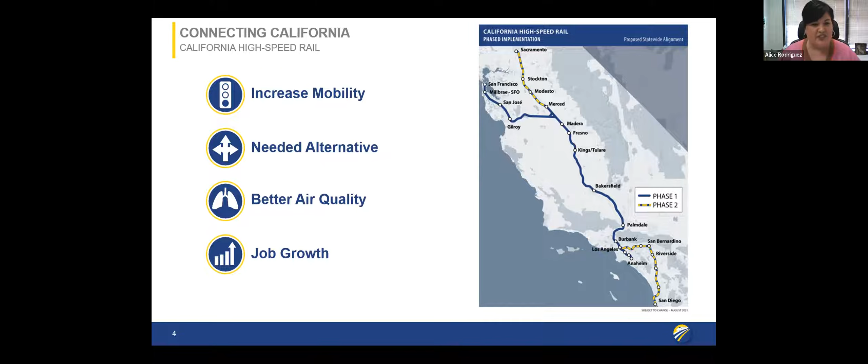All right, let's dive in a little bit deeper. I'll start in the middle of the map here, that yellow line. 119 miles is actively in construction from Madera to just north of Bakersfield. As you extend up from that dark yellow center line, you see Merced to the north and Bakersfield to the south. That represents an initial operating segment we're working on now, and we are committed to complete it.

There's other work happening across the state. If you look to the north from San Francisco to San Jose, high-speed rail is a funding partner with the Caltrain electrification program, so that's already underway. Additionally, down in Los Angeles, we are a funding partner with LA Metro on the improvements happening to the LA Union Station.

The rest of that dark black line on the alignment represents places where we're still working on environmental clearance. Right now, we have nearly 300 miles already environmentally cleared. By the end of the year, we will have over 400. And then station planning is happening as well across the alignment.

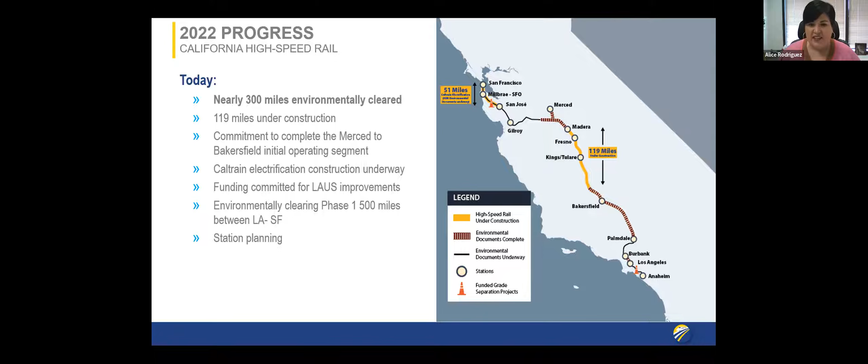Okay, so here's some of the things that are already happening. This is our progress as we look at where we are right now in 2022. We've already created over 7,300 construction jobs, including national targeted workers. 653 small businesses have already been employed, including 213 disadvantaged businesses and 76 disabled veteran business-owned enterprises. We're very, very proud of that.

As I mentioned before, California High-Speed Rail will be run on 100% electric and renewable energy. Already we're doing things like using Tier 4 equipment on our construction sites, hoping to provide a mode shift already in the construction of high-speed rail. And once high-speed rail is built out, we'll reduce vehicle miles traveled, about 400,000 cars off the road annually, which is quite significant.

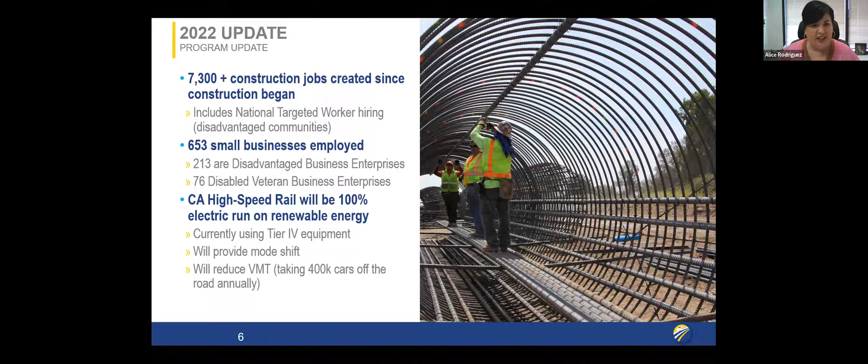I think that wraps up my slides. Let's see.

Okay. So as I do this, our first panelist, Michael, if he wants to share his screen, I'll do a little introduction. Michael Heke is a mechanical engineer and specialist in fluid dynamics. He started his professional career as an aerodynamicist 16 years ago at DB Systemtechnik, a branch of Deutsche Bahn AG. During that time, he worked on many topics regarding tunnel and train aerodynamics as an engineer, project leader, and consultant. His special field is the sonic boom phenomenon. In close collaboration with German authorities, he established a national German regulation regarding sonic booms. Michael, welcome and take it away.

Okay, thank you, Alice. Today I'm going to talk about a very special phenomenon on noise emissions. We call it the sonic boom. The naming comes as it sounds very similar to the sonic boom from an airplane traveling at supersonic speed, but the physics behind it is a little bit different.

So I go to the next slide. Can you see with my red dot? I'm not sure if the sharing works well. Yes, we can see it. Okay, thank you, thank you.

So when the train enters a tunnel, the air in the tunnel is compressed and a compression wave is formed. Here is an illustration of this compression wave. It consists of two parts: a strong increase due to the head entry, and a weak increase due to the entry of the train body, due to frictional effects. This first part is the relevant part.

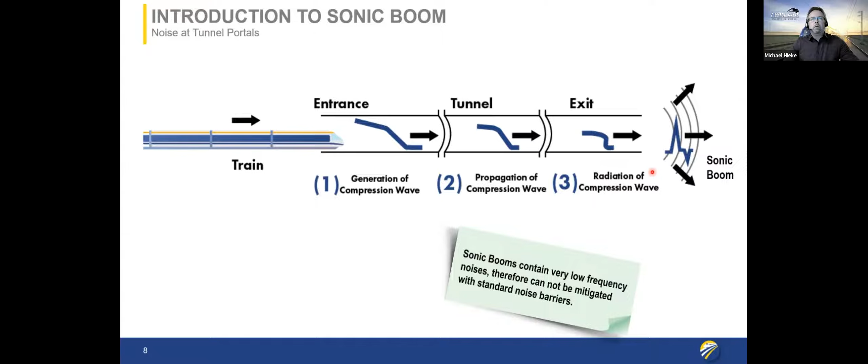Here you will see a video from Spain, I took it from YouTube. This is a very unfavorable case - this tunnel has no mitigation measures, and you will hear a very loud sonic boom. So please enjoy.

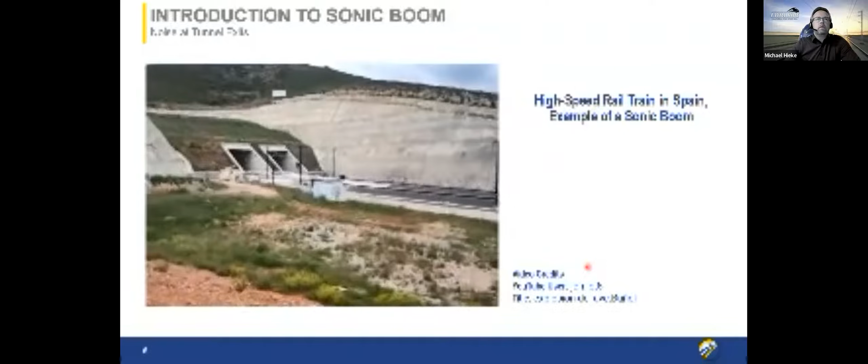Yeah, so that was the train generating this sonic boom. What factors influence the sonic boom effect?

On operating conditions, you have the operating speed. The faster you travel, the stronger the sonic boom will be. On infrastructure, we have the cross section of the tunnel, which is relevant. The smaller the cross section, the more the air must be compressed, the higher the pressure and the higher the gradient.

Also, the use of slab track. Maybe I have to explain: slab track is when the rails are mounted on a smooth concrete surface. It's quite fixed and quite strong and good for high speed, in comparison to the old track bed where you have ballast stones. We have the sleepers and the ballast stones, but for high speed you usually use a slab track, which makes it more stiff. Slab track has no damping effect for the compression wave when it travels through the tunnel, so slab track is a little bit bad for sonic boom.

Tunnel length is an important thing. The longer the tunnel, the more the compression wave can steepen. The design of the portal hoods matters too - the shorter the portal, meaning a vertical portal, gives you the shortest entry time. If you have a sloped portal, the entry time is a little bit longer, and therefore the gradient is a little bit smaller. Or you have portal hoods - I'll come back to this later.

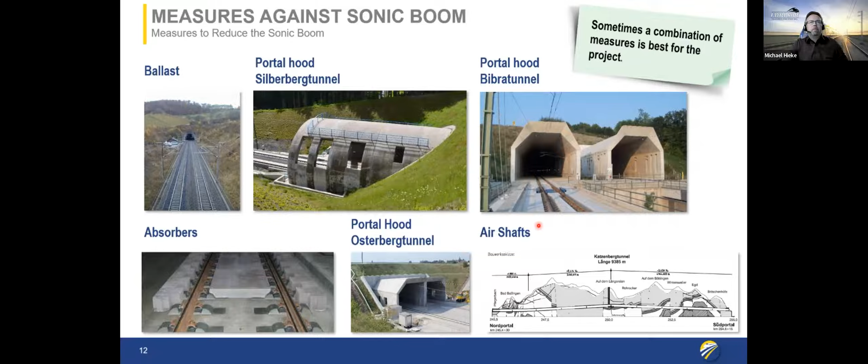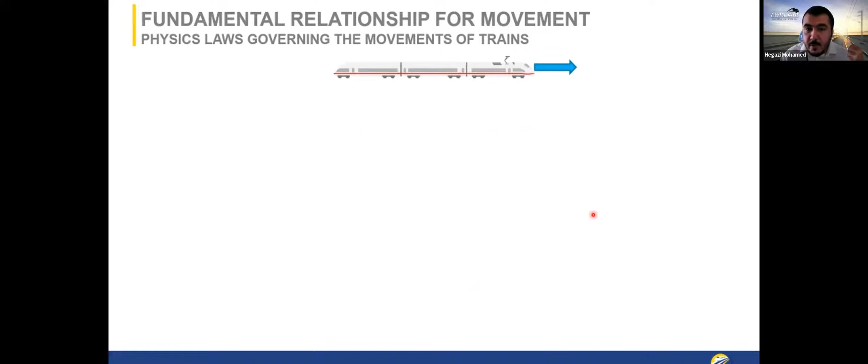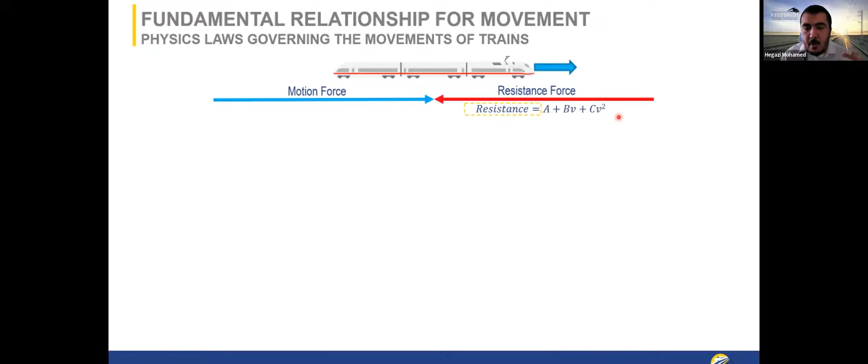Now I'd like to pay some special attention to the resistance force to gain an appreciation of how much force resists the motion of a train. A resistance force is made up of three main components, shown here as the sum of three components: A, BV, and CV squared. A, B, and C are coefficients, they're factors, and V is the velocity or speed of the train.

But then you have dynamic resistance forces that increase proportionally to speed, like flange rail contact. Railway wheels have a flange, a lip, that rubs against the inside of the rail to keep the train within the tracks. The faster the wheels spin, the more friction is generated with the inside of the rail, and that is a dynamic resistance that increases with speed. Then you have aerodynamic resistances, which are proportional to the square of speed, so they increase non-linearly, mainly because of movement in air.

That's related to a point Michael talked about in the previous presentation, where he focused on the specific case of trains in tunnels, where the air doesn't really have much space to go except forward, because the tunnel is restricting it. But even if a train is not in a tunnel, it still has to push air molecules away, and that is a resistance. So for high-speed rail that goes up to these high speeds, you start to see the amount of resistance the train has to combat.

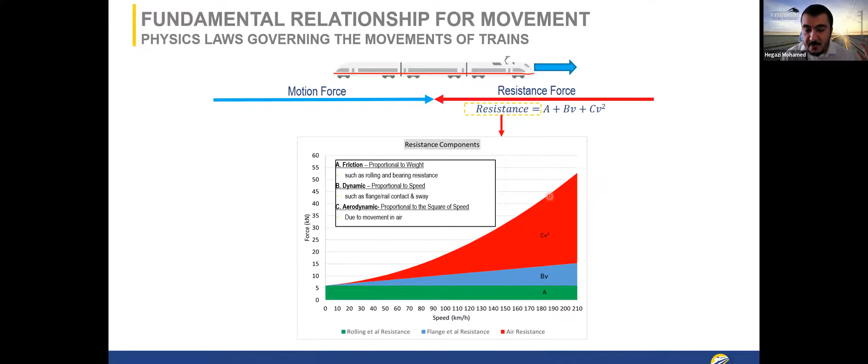So the faster you go, the more resistance, and then you need more force to combat this resistance so you can go even faster. This translates into power, so we have to calculate power to size up our engines, for example, or to know how much power from the utility your electrified train, if it is electrified, will draw. This power is mostly in watts, kilowatts, or megawatts. Power is a product of force and speed, so the faster you're going and the more resistance you face, the more force you need to keep accelerating, and that causes your instantaneous power demand to go up.

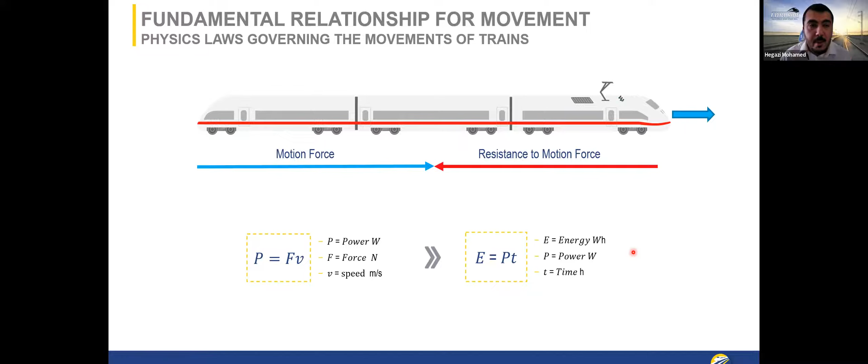This power, if you add it cumulatively, or multiply it by time, gets you energy. So if you demand 1 kilowatt of power for a full hour, that's 1 kilowatt hour of energy. You need to calculate this too, because you have to know how all the speeds and forces translate into fuel consumption, for example. If you're electrified, you have to pay your utility bill, that's energy consumption your utility company will charge you. They'll factor in energy and power as well. So this is how force and speed translate into power and energy.

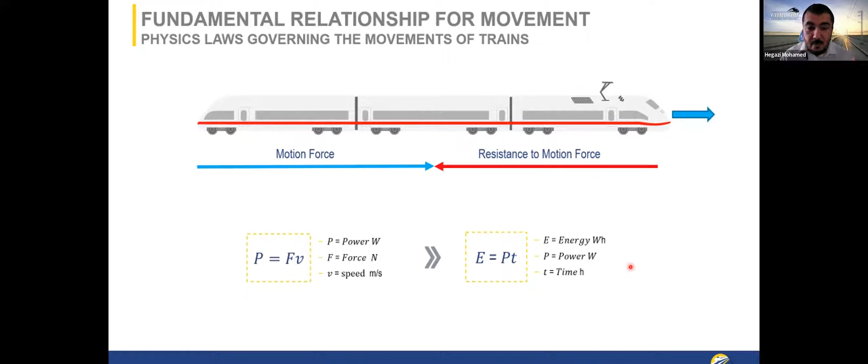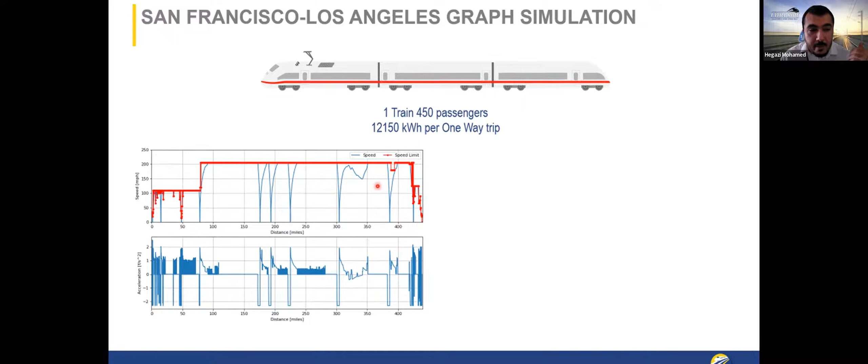Here's a sample simulation of something we typically do, where we run a simulation and solve these equations on a slightly more detailed level, for a San Francisco to LA trip. Here you see a speed profile, where the y-axis is speed in miles per hour and the x-axis is distance in miles. In red, you have a speed limit, dictated by the curvature of your track and things like that. There's a speed limit on certain sections that you can't exceed.

In blue, you see the actual speed of the train, and you see it going down to stop. So this would be a station right here, and then accelerating again, and then decelerating to stop at the next station. And when there is no station and it can meet the maximum speed, it will just keep this top speed and maintain it until it goes back down.

And again, this translates into acceleration, which is the rate of change of speed. So when it's decelerating or accelerating, you see these spikes. The acceleration will go negative, which basically means you're decelerating, trying to stop, and then it will go positive again when you're accelerating and trying to move again.

And these kinds of calculations translate into power. So over here, you see power demand versus distance. In blue, you see tractive power, which is power to move your train. Typically, this will come from your grid or from your engine. Right here, it's at the wheels, so you need to calculate for some efficiencies to see how much the engine will have to produce.

And in red, you see braking power. Essentially, that's power at the brake, when your brakes hit your wheels to generate enough force to retard the train for you to stop at your intended location. And when you integrate this power, or cumulatively sum it, you get your energy consumption curve, which tells you how much energy this train is consuming. In this case, energy consumption just goes up because we're not recovering some of the energy when we are braking, just in the simulation, but we could recover it.

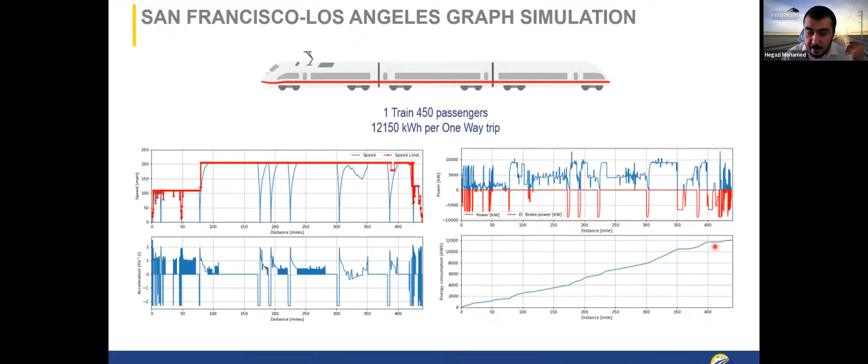So what are some zero emission options that we have available? The golden standard is overhead contact system, OCS, where basically you don't carry your fuel with you because you have access to theoretically not infinite, but practically infinite power from the grid. This is really the golden standard because it gives you the ability to put more people on board, since you don't have to haul your energy source around in the train itself.

Then you have battery motive power, where you charge batteries and put them on board your train, just like a Tesla. Batteries provide everything, and however much battery you can store dictates how long you can go for and how often you refuel. Here we have some examples like Stadler's FLIRT Akku, which is a battery-powered EMU. And recently we also had hydrogen motive power, where just like batteries, your energy comes from hydrogen, combined with oxygen through a fuel cell system to generate electricity, like Alstom's Coradia iLint, which is the world's first hydrogen-powered train, operating west of Hamburg in Germany.

So what would these trains look like if we were to compare them all on a high-speed rail basis? As you can see, these two trains aren't high-speed rail, compared to the California High-Speed Rail Authority's OCS system. So if you'd have a typical 8 or 10 car train carrying passengers, getting its energy from the electrification infrastructure...

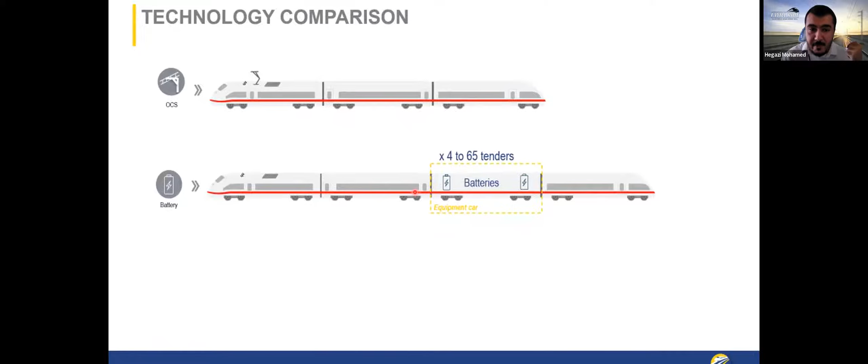But then if you were to try to make the same trip with a battery train, because you have to haul your batteries around, depending on how often you want to refuel, or in this case recharge, you'd need to carry between 4 and 65 battery tenders—full cars full of batteries just to have the energy around. Now the vision is slightly better with hydrogen, because hydrogen is much more energy dense than lithium batteries, and therefore you carry between 3 to 16 tenders, depending on the hydrogen pressure and other factors, but you'll still need to carry some hydrogen tenders with you.

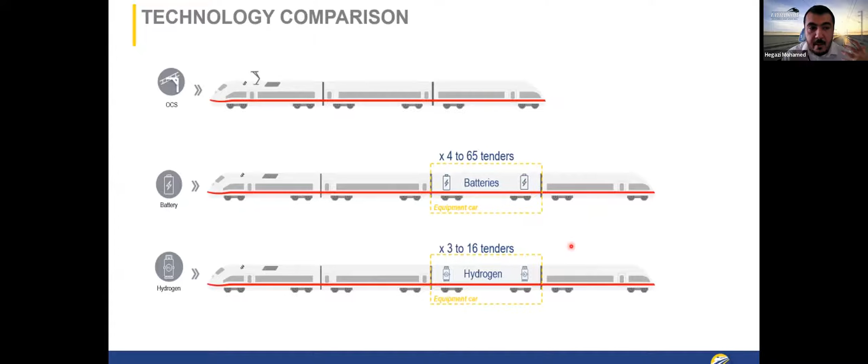The impact of hauling your fuel around is basically a different energy efficiency or utilization, because every additional car you add to the train to carry fuel requires energy to haul that car itself. So you can imagine there's a law of diminishing returns, if you will. If you plot energy consumption in kilowatt-hours per passenger, the train is longer but carries the same number of people—it's only longer because it's carrying fuel. So it's a longer train, it'll consume more to do the same trip, moving the same number of people.

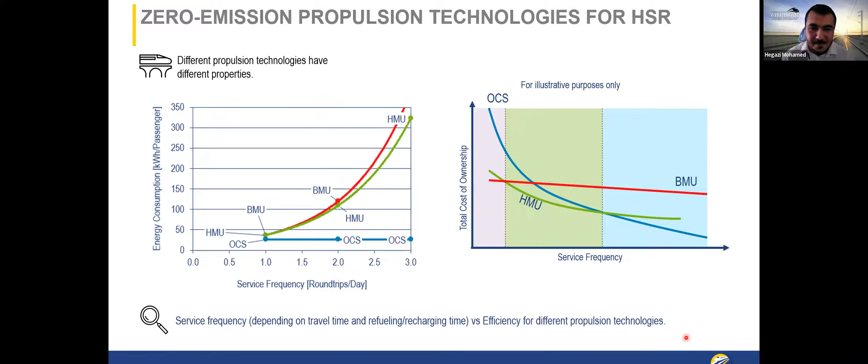Thank you, Hegazi. That was great. I love hearing and learning about that. So interesting. Okay, we'll get to questions in a minute. We still have one more to go. So thank you, Hegazi. Let me go ahead and introduce Jorge Rios.

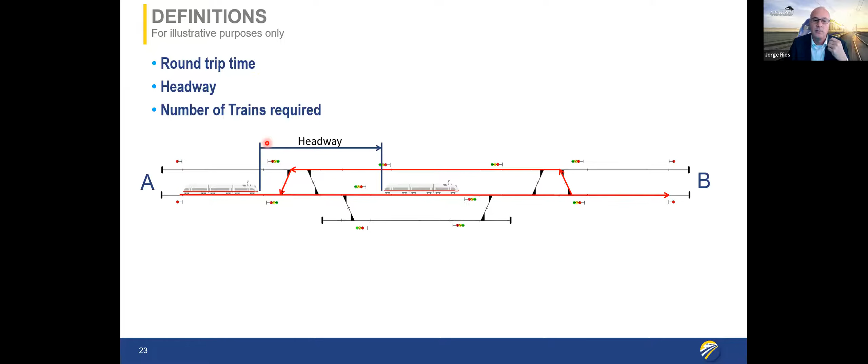So let's do a little calculation, and I have a question for the audience. Assuming that going from A to B and then coming back to A takes 6 hours as a round trip, and we want to have a train every 5 minutes, again just for illustrative purposes, how many trains are we going to have running in the system at the same time?

Here's a little formula: you divide the round trip time, 6 hours times 60, so 360 minutes, by the desired headway, in this case 5 minutes, and you'll need 72 trains running at the same time in the alignment, all of them reaching 220 miles per hour. So it's not only that we need to stop one train, we need to be able to stop all 72 trains at the proper time.

This is a very simplified equation for the purpose of this explanation, but in real life we normally use simulation software, because you need to account for a lot of additional operational points: the stopping time in stations, the pathing, buffer for operations, and additional trains crossing the alignment. So in real life we use software similar to the simulation Hegazi showed at the beginning, just to define the fleet size. But for this explanation, let's remember we'll theoretically need 72 trains running at the same time.

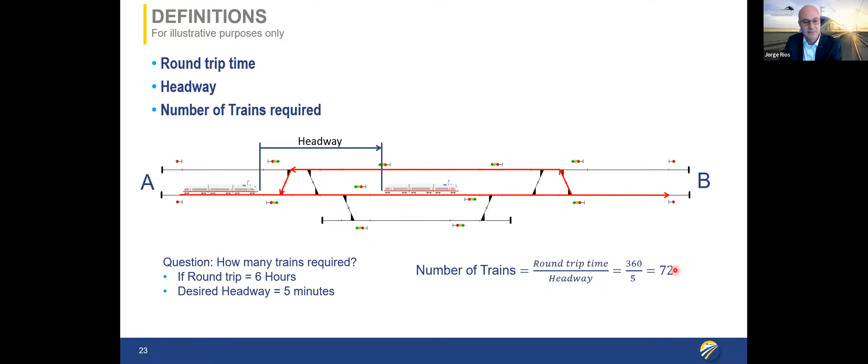But again, yes, you want to be sure that you brake and have enough power, but you don't want to spill your wine. We don't want the train to feel like a roller coaster, with passengers screaming every time the train stops from 220 miles per hour to 0. So normally the train control systems have two different braking curves.

The first one, on the y-axis we have the speed. If we have a train running at 220 and everything is as planned, nothing going wrong, we apply a braking curve we call the service braking curve. It's a comfort braking curve where you won't even notice the train decelerating. Of course you will notice it, but it's very soft, so you can most probably keep drinking your wine without any issues.

And if you apply these movement equations, I won't go into the details, but if you build them in an Excel spreadsheet using this deceleration curve, you get this line. In this case, for illustration purposes assuming 1.9 feet per square second, the train will need to start braking 5.2 miles before it needs to stop.

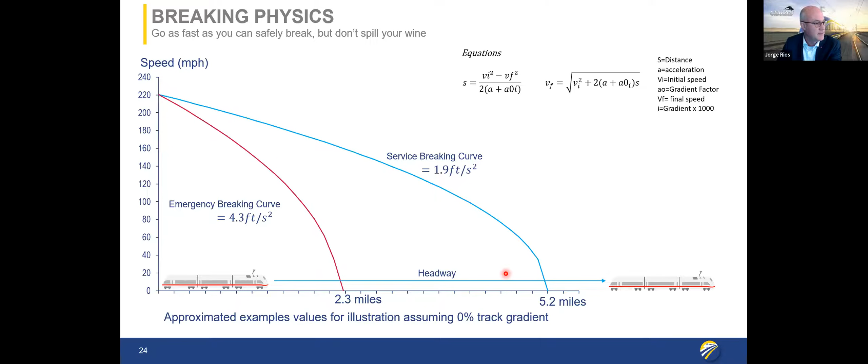I mentioned that one of the things heavily impacting the braking distance is the slope. Of course, if you go down, the available braking power of the train will be reduced. So you can do the little calculation. If you assume there's a gradient in the slope and the train is going down, using the equations of gravity and the mass of the train, and assuming a slope of 1 per 1,000 gradient, you'll come to the conclusion that you need to penalize the existing braking power of the train by 0.033 feet per square second. Meaning, if you're going behind another train and you start going down, you need to increase the distance between the two trains.

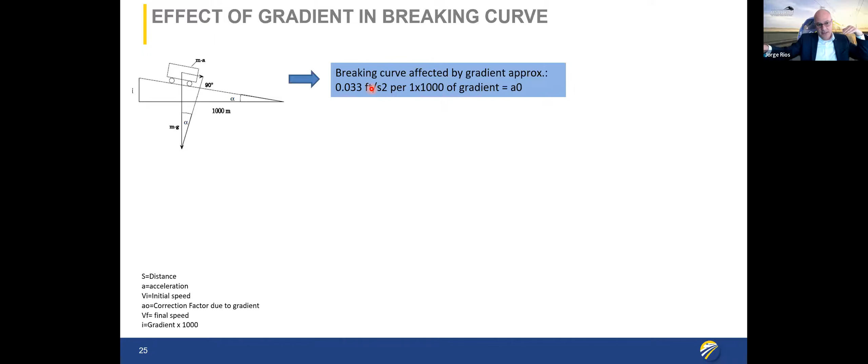So if we do the same exercise and try to solve the same equation as before, assuming we're coming at 220 miles per hour, using exactly the same braking curve I showed before, 4.3 feet per square second. But this time we're also introducing a gradient or slope of 50 per 1,000, equivalent to 5% gradient going down. Using the same equation to find the distance needed to stop, and penalizing the braking power of the train with this factor, you will need 3.8 miles. If you remember, when we used 4.3 feet per square second in the previous chart, we were showing 2.3 miles in flat terrain. So a 5% gradient will require, theoretically, 1.5 miles more distance to be able to stop the train.

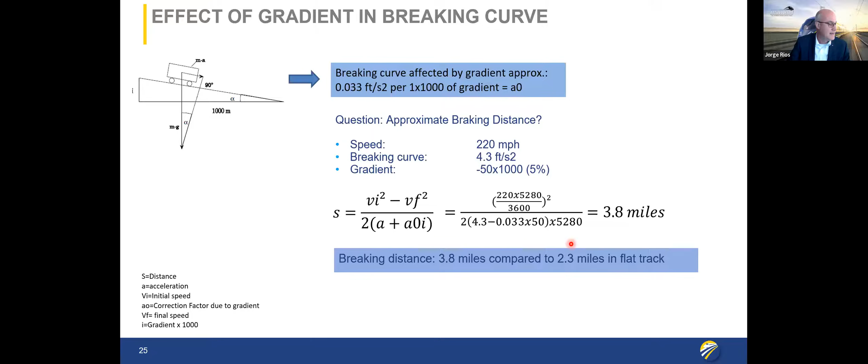Now let's speak about something a little bit different. Now let's talk about safety.

And this is one of my favorite TV shows, called What Could Possibly Go Wrong.

I want to introduce here another term, which is tolerable hazard rate. What will be a tolerable rate of potential hazardous or dangerous failures in the system? What will be acceptable for these kinds of systems?

Just for the purpose of explanation, let's imagine I'm going to put a human being, a well-trained driver, in the train. He has a brake, he has a lever, he can accelerate and also control the speed, but also apply the brakes. He has a way of measuring the speed. He's been trained on the terrain, he knows what speed he needs to keep in each of the curves. And then he's able to look if there's anything blocking the track - he can see the signals, and he can see if there are any issues on the track.

We will allocate to this human being a safety function. We are going to tell him: my dear driver, you need to observe the track, and you need to keep a safe speed and distance. So easy. And then according to international statistics, a human being can perform safety functions, but statistically - and this applies at lower speeds - if you remember the distance we need for stopping this high-speed train, by the time the driver is able to see the obstacle, it's too late. He should be stopping or starting to brake several miles before.

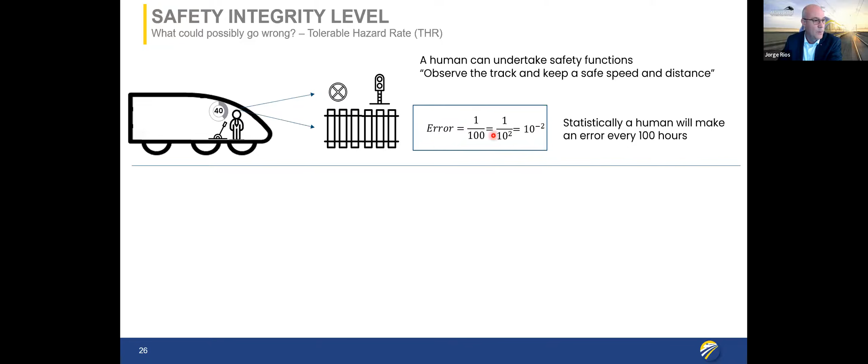So of course, one error every 100 hours, and if you then multiply by 72 trains, this means that you will be having a dangerous situation potentially every couple of hours if you have 72 trains at the same time.

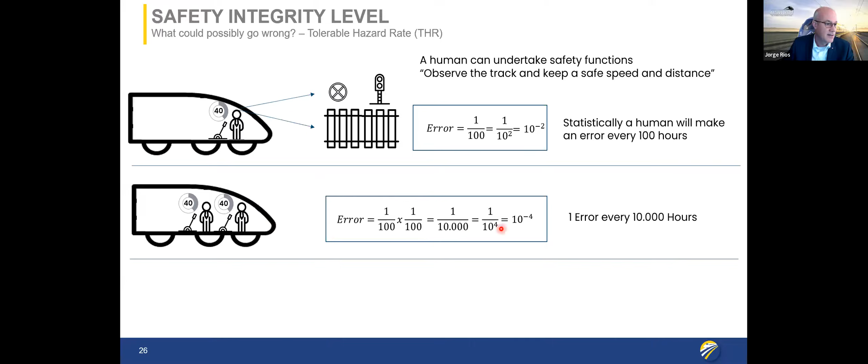So what if we put on board 2 drivers, and each one of these drivers has the possibility of observing and an independent way of stopping the train? Any of them could stop the train if they see something wrong. If we do the math, and each one is making one mistake every 100 hours, combining these 2 humans, they will have an error every 10,000 hours. So yes, we got an improvement. This is now represented as 10 to the minus 4.

And we can continue. Instead of carrying passengers, we can continue adding braking systems and drivers. And if I add 3, just once more for fun, the error will be 10 to the minus 6.

And this is the international or European standard, the EN 50129, which is used for signaling systems and train control systems. Anything under 10 to the minus 5 is considered non-safety related, what we call basic integrity. In this case, 10 to the minus 6 is just the lowest level of safety according to the standard. But the European requirement, for example for the European train control system for these kind of trains, will require as a minimum something between 10 to the minus 8 to 10 to the minus 9.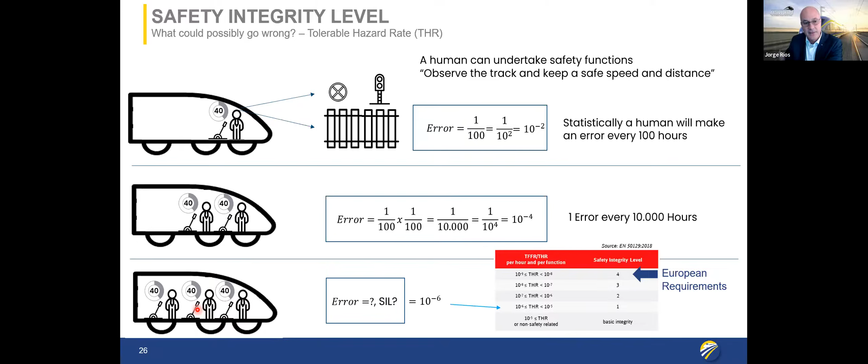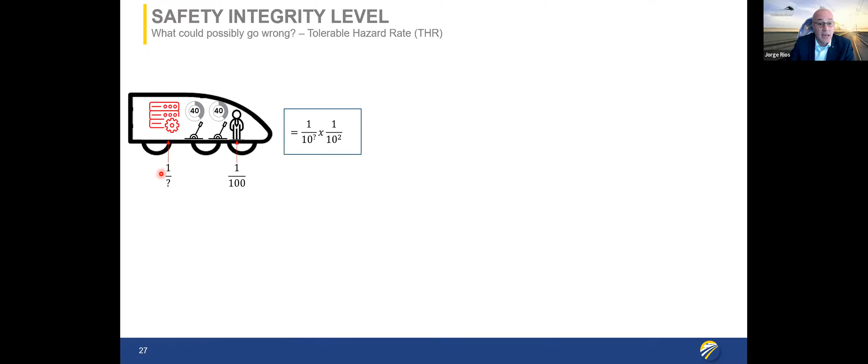So what if, instead of adding and adding human beings, we add 1 computer to the train? Then of course the question will be: how often will this computer fail? We need to do the little calculation. The most modern safety train control systems have dangerous failure rates.

Again, I am only counting here the safety related failures. I'm not counting, for example, if for some reason the power of the system is off and the train cannot start. Even though this is a failure, it is not a safety related failure. But if I cannot stop the train, then it's a safety issue.

So these kind of computers, when they fail, are certified to be able to claim that statistically they will fail less than once every billion hours.

But for a system of this level to be able to claim this, what is called the safety integrity level according to the European or international standards, they not only need to demonstrate the technical safety and how robust and good the equipment is, they also need to demonstrate that the processes used to develop the system are strong processes, and there are a lot of regulations for the process of designing these train control systems.